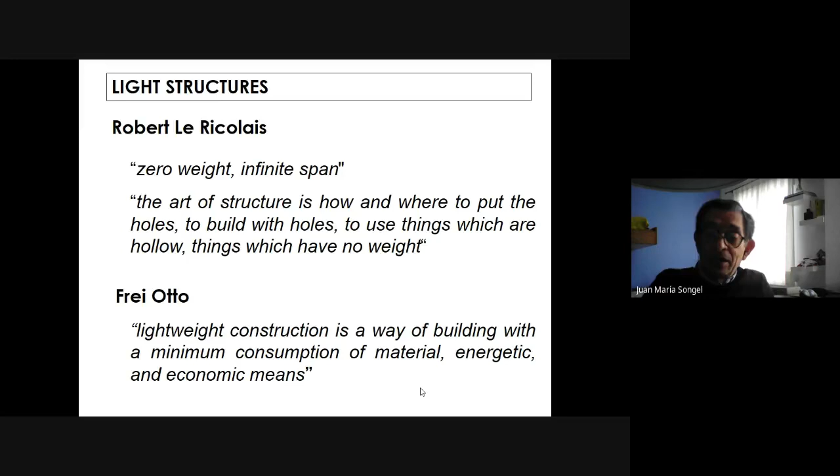Concerning natural structures, we've been talking about light structures, natural structures. There is another author, Matila Ghyka, who in a very interesting book, originally written in French and translated into English, The Geometry of Art and Life, underlines the principle of least action for the inorganic world and the principle of economy of material for the organic world. So least action and economy of material: two principles present, active, in the inorganic and the organic world.

And Frei Otto, concerning natural structures, says that the form of a natural structure is the form of a structure which transmits the forces received to the supporting points with the least amount of material. Again, amount of material. And somewhere else he says that natural structures are structural systems whose construction does not derive from a planned process, but comes from self-forming or self-organizing processes. Now, this is a key idea.

If we see, as we are going to do, his models and his explorations, we will see immediately that his approach is not to impose a preconceived idea on a certain material, but to see which forms that material generates from different types of forces. So he explores in his experiments many different physical self-forming processes. Let me give a very simple example.

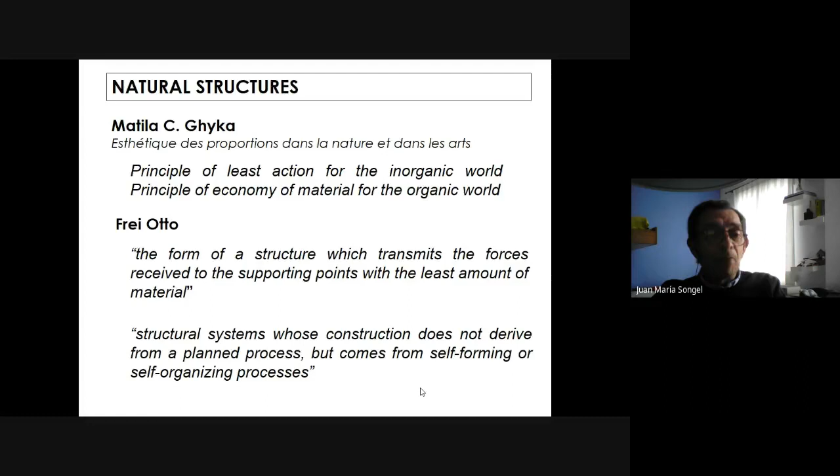If you take a chain and you hang it from both ends, the chain immediately adopts the most suitable form to work in tension, because that chain is absolutely unable to work in compression. So it adopts the form of a catenary curve to make sure that all stresses are tension and no compression. That's a simple self-forming process. The material itself has found the most adequate form to transmit loads in the most effective, most appropriate way.

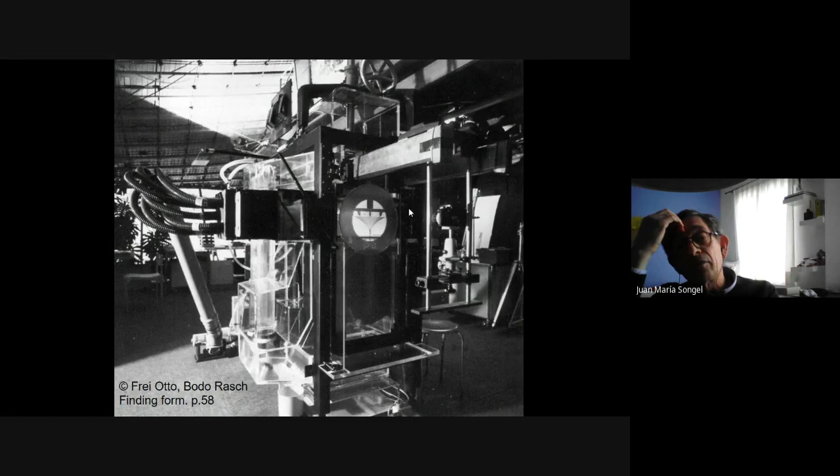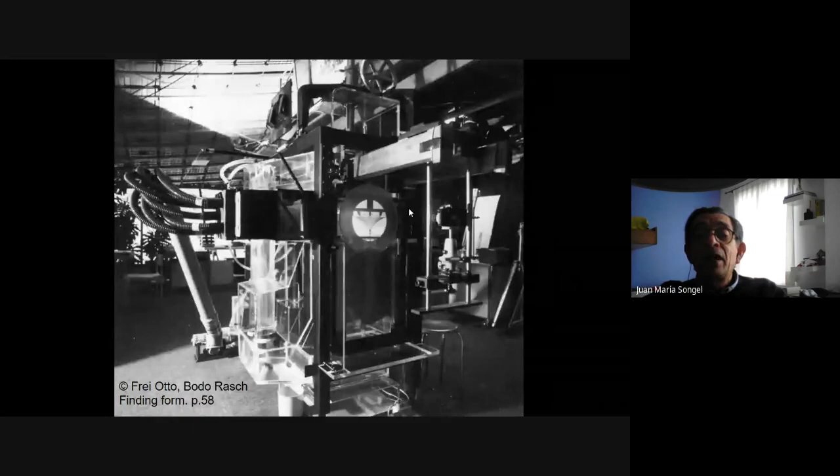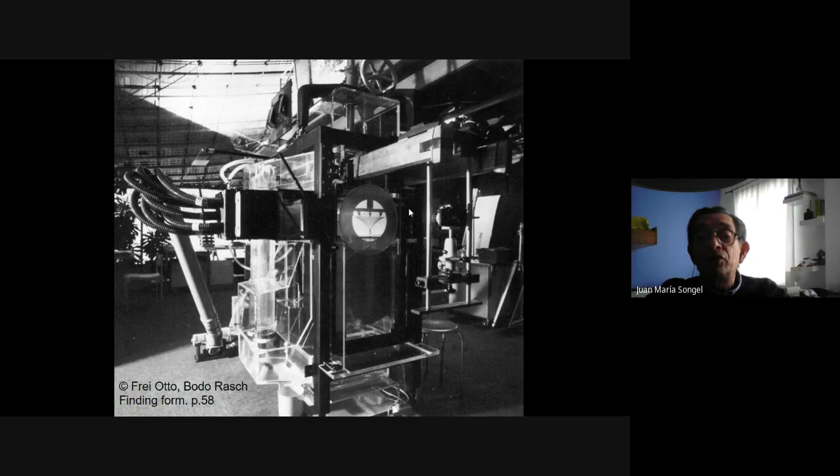He worked with soap film models, which are, as we will see later on, physical phenomena that develop minimum surfaces with specific border conditions. Soap film is a very weak structure. It breaks very easily, very quickly, and it therefore needs a chamber with damp and low temperature in order to allow these forms to stay.

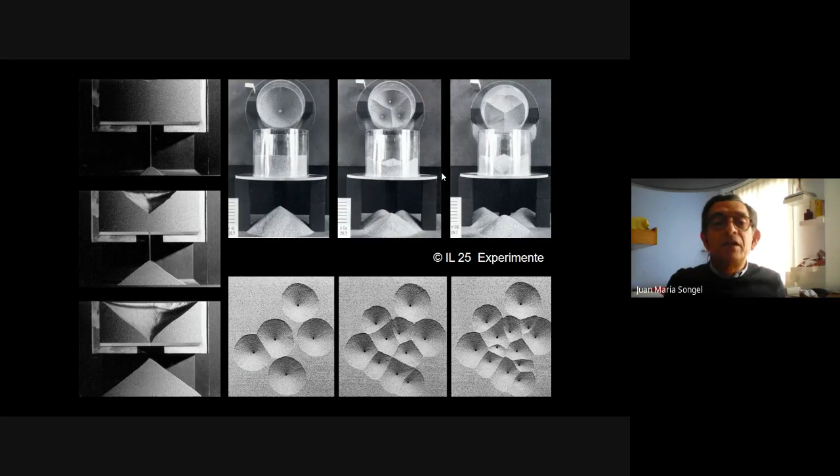Other types of experiments and models are grain heaps. Which forms do heaps of grain develop when, for example, you take a cube in which you have grain and one hole? That hole allows grain to pour down and create a sort of mountain with the adequate slope. You know, this is the natural slope according to the material.

And you see how this form develops, and also this form, a void and a solid. So at the end, you get these two forms. Now, when you do this with a number of mountains, you get these forms. Instead of one single heap, you connect different heaps of grains of, for example, sand. Here you get different forms. All of them are the result of a physical phenomenon, a physical self-forming process.

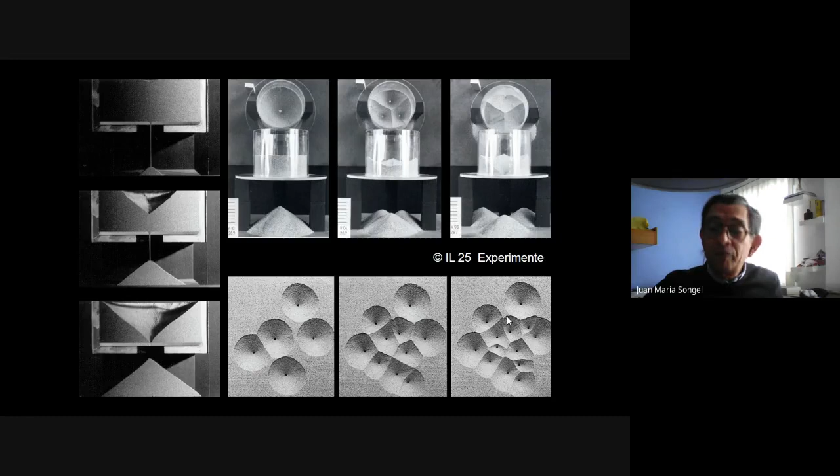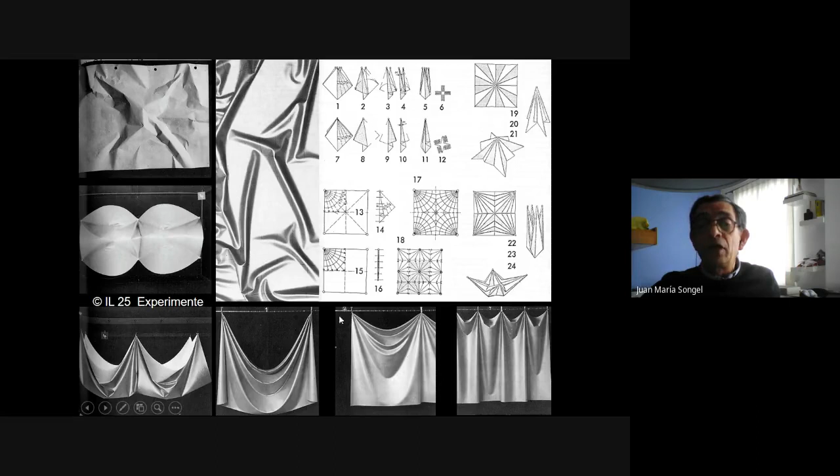So by exploring folds, he developed deployable structures, roofs made up with pieces of cloth with extending membranes that can be folded out and down, can be deployed, and as you can see here, either making radial foldings, these are radial foldings, or linear, rectilinear folds made up by running along a rectilinear straight line.

This is a model of another of Frei Otto's inventions. That was invented quite early in his life. He was 25 or 26 at that time, in 1950, when he developed this model. It is a multi-hinge arch.

Well, the theory of structures says that when an arch has more than 3 hinges, if an arch has 4 hinges, then it collapses. But Frei Otto, in his experience in life, you know that he took part in the Second World War as a pilot, and he saw ruins of structures, ruins of walls and arches, and he saw arches with more hinges than the theory he had learned. And so he thought, well, why is it really possible to build an arch with many hinges? And that's the model that he developed.

You see that the voussoirs, or the different parts of the arch, are made up by convex surfaces. Convex surfaces, they are singly curved surfaces, convex to each other, and therefore connecting on one single line. This piece with this piece connects at this point, this with this one at this point, this one with this one at this point. So the thing is that the weight does not surpass either end of the voussoirs, either here, or there. As long as the connection point is within the thickness of the model, it is stable.

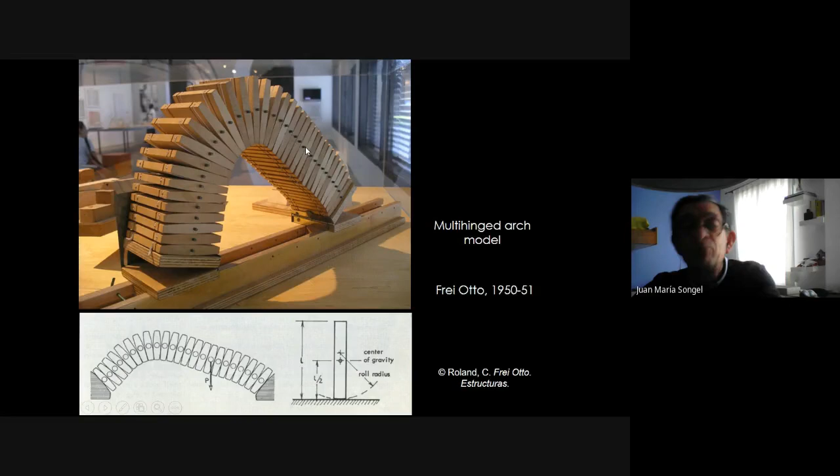Other inventions by Frei Otto, always trying to make the most out of the least. That was also part of his experience in the prisoner camp in Chartres in France, where he stayed for 2 years after the end of the war, from 1945 till 1947. Much scarcity of means, of materials.

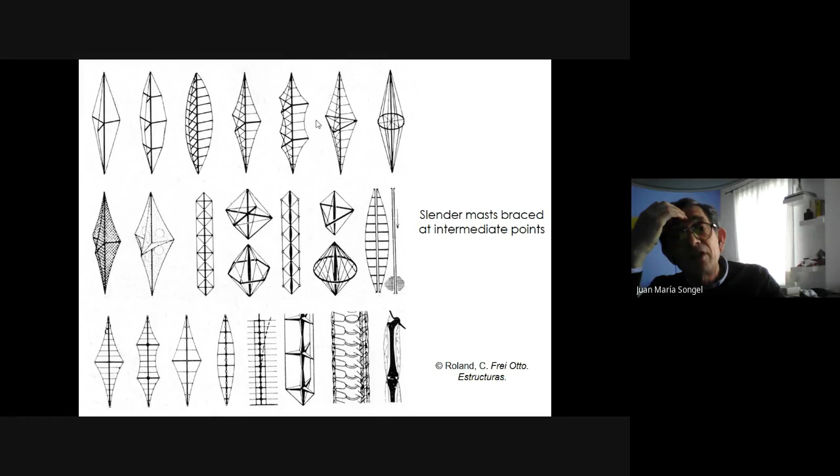How to build a bridge with rests of railway metallic elements, for example. How to build a column just with extremely slender elements, slender masts, by bracing them at intermediate points, as you see here. So here we see a combination of compressed masts and tensioned cables, creating an overall slender mast. Here we see also a picture of our column, the human column at the back, which somehow reminds one of these types of structures.

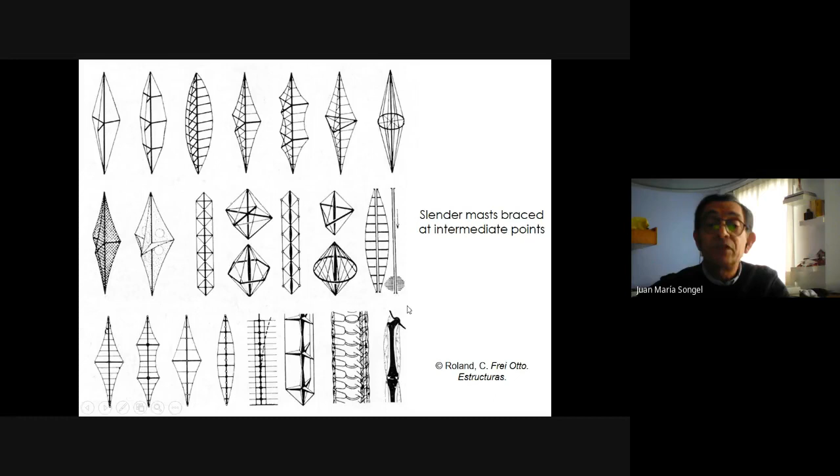And that's actually also the source of inspiration for these types of models that he also developed. A hinged mast, or as he called this, a mobile arm. You see a core which is made up of a steel slim element here, these triangular plexiglass elements, and these tensioned cables that allow you to control this hinged mast or mobile arm. You can move it in different directions depending on the strings that you are pulling at the bottom.

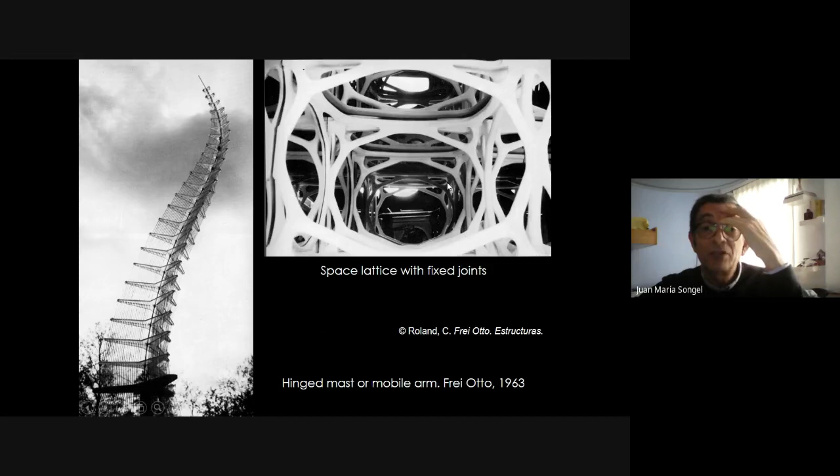And also another structure that he developed. This resembles very much this: when Buckminster Fuller, a great friend of Frei Otto, saw these models, he also saw pictures taken from microscopic creatures like radiolaria, for example, or pieces of bones. And there they found that the patterns developed were very similar to the ones that he had developed here, for example, this sort of a space lattice with fixed joints.

Another type of model is branching structures. These are made up by applying the inversion principle with hanging strings. There we start with this point. Here we have strings branching from this point until that point, and from that point another group of branches here, so that you get at the end this grid of points, from this point to this grid, through an intermediate group of branches with different levels.

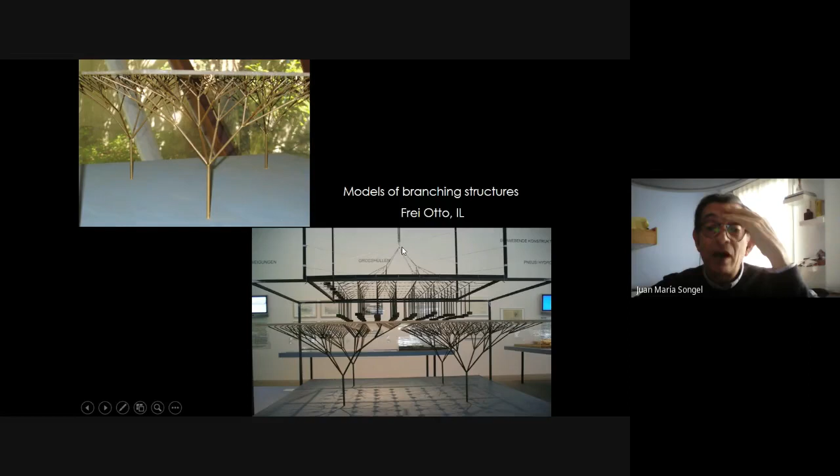And these are hanging loads. These hanging loads are tensioning all these strings and are another physical self-forming process, because this load is giving the actual slope and the final form for these strings. And if you are sure that they are working in tension, because they are not able to work in compression as they are hanged, then you invert it and you get this branching pattern in which all the different bars or elements should be working in compression.

So loads coming from, we could only talk about gravity here, vertical loads, no horizontal, no wind, no earthquake, only vertical. The form shaper, the element that is shaping the form of these models and these structures, is gravity. So here we have this branching structure developed, as you can see, with 1, 2, 3 branching levels from the bottom till the top.

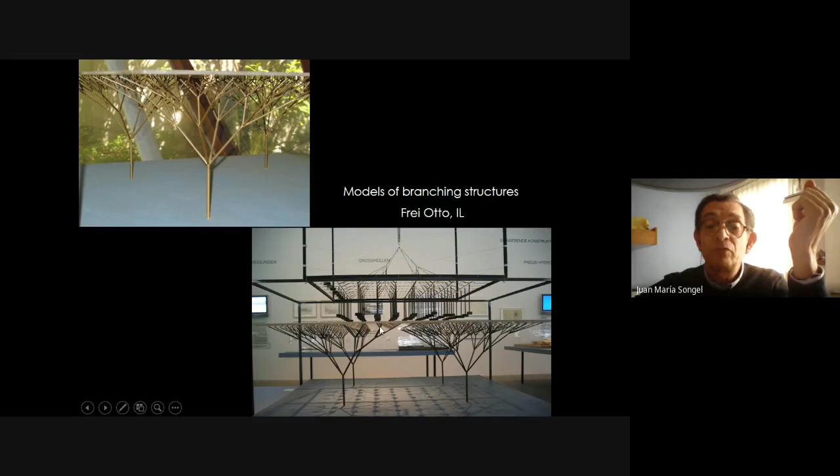And one real structure built with this type of branching structures you find in the main hall of the Stuttgart airport, which was not designed by Frei Otto. Frei Otto, we must say, invented new types of structures with his experiments, with his explorations, but it was in the collaboration with other architects who actually built these real size structures, like this Stuttgart airport. But of course, without the inspiration of Frei Otto, this would be inconceivable.

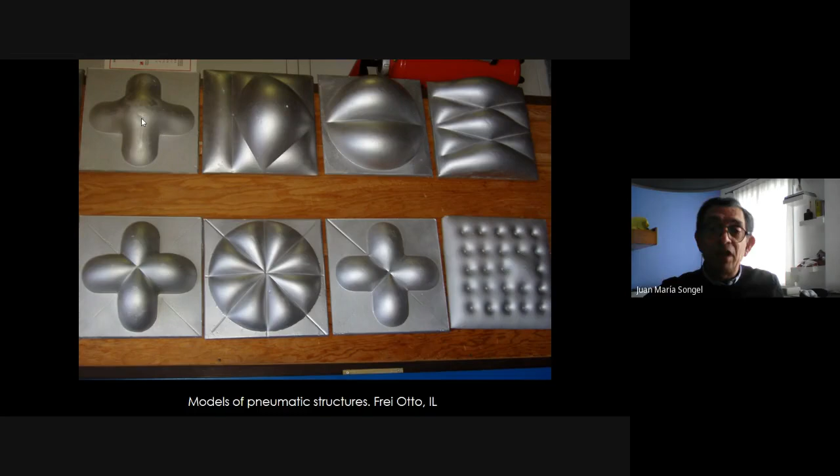Another model that we can find in the famous Frei Otto's tent, his institute, is this three-dimensional model of the Pantheon in Rome, this famous Roman structure that is still standing nowadays since the 2nd century, with a span of 43 meters and 30 centimeters that was not surpassed until the 19th century, when new materials like wrought iron were developed. So Frei Otto was trying to find out why the Pantheon was stable, and what was the relationship between a funicular hanging form and the form of the Pantheon.

This is always an interesting issue, because we see that along the history of architecture, vaults have adopted very specific forms in Roman times, in Romanesque architecture, Gothic architecture, very often based on the geometrical simplicity needed for construction purposes, but seldom trying to wonder which one would be the most suitable form to work in compression only. So there we have the funicular forms, these hanging models. All of you are familiar.

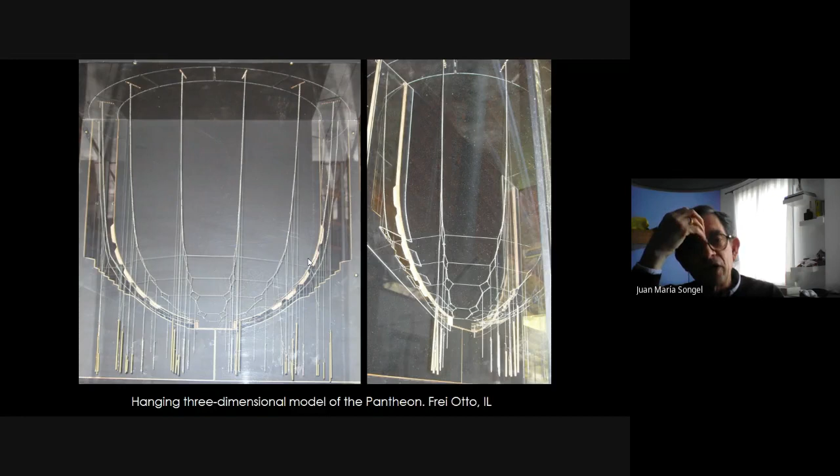I'm sure all of you know the famous Gaudí hanging models. Now the thing here is that these models developed by Frei Otto are three-dimensional. They are hanging strings, which do not stay on one single plane, but are also developed along the base of the Pantheon. And you will notice that once you apply the loads at specific points, trying to reproduce the actual gravity loads, you see the final form developed within the thickness of the actual structure. And that would be the reason why it is stable.

And on the other hand, these stresses, which in this case are tension, but if you invert the structure, that would correspond to compression, indicate that the semispherical dome is compressed along the upper hoop lines, but tensioned along the lower hoop lines. That's something that was known because cracks usually appeared with this semispherical geometry, with this type of domes.

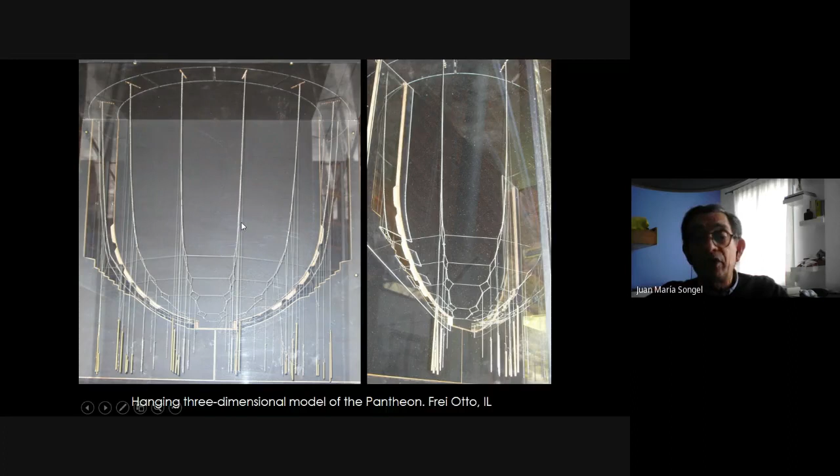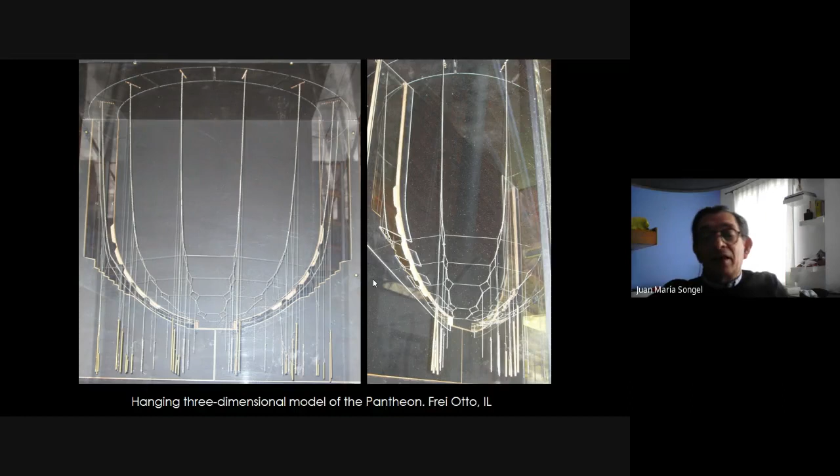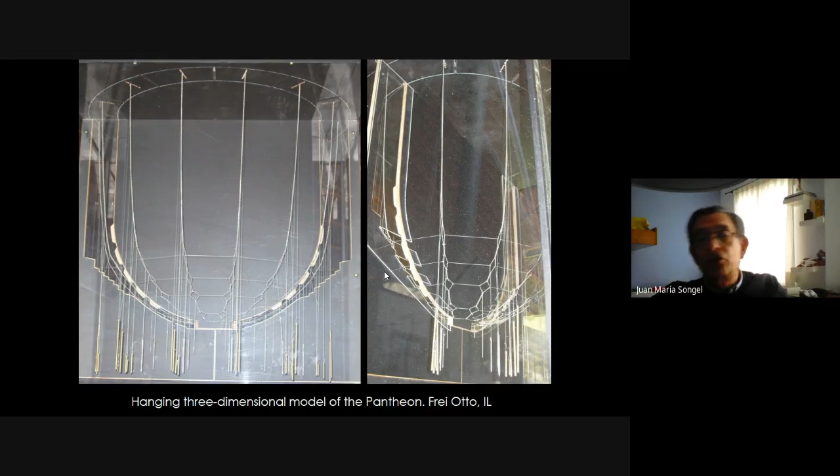But this model I wanted to show you just as a way of seeing how Frei Otto worked with them to explore the actual structural behavior of such historical structures as the Pantheon. Now, this is a summarizing scheme showing different self-forming physical processes. We've been seeing several of them used by Frei Otto, classified in accordance with the generating forces.

This has been taken from one of the books published by the institute founded by Frei Otto, which is devoted to the different types of experiments that he developed. These are physical processes in which tension is the protagonist, starting from a simple cable being pulled apart from both ends, or a chain being hung from both ends, or a simple straight vertical line with a weight at the end, or these minimal ways I showed you before, or these minimal surfaces with two upper points and two lower points developing with a soap film model, for example.

Soap films, branching of viscous liquids, cable nets developing minimum surfaces. These polyhedral foams we saw also, tight packing. Compression, the multi-hinged arch we saw, the inversion of the catenary, these arches, and other suspended nets that we will see also later on.

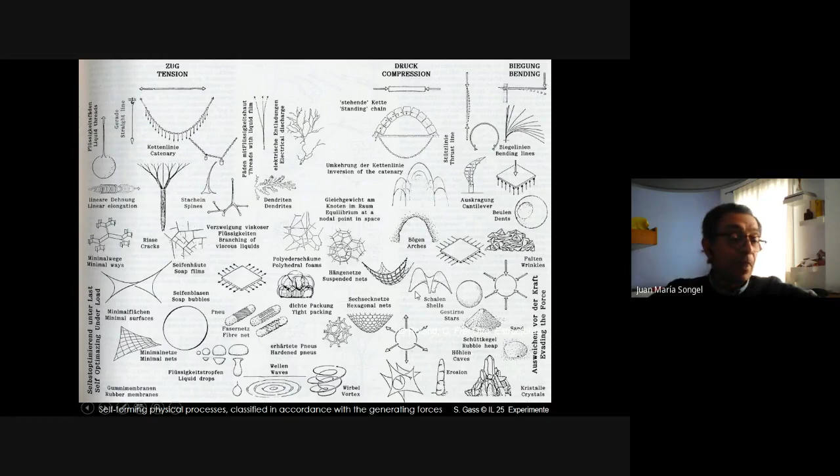Well, I see that we are running out of time. We have only 5 minutes left. I'm sorry that I have been a little bit too slow, maybe. But it's fine, Juan María. Yeah, I just wanted to show you, in these 5 last minutes, at least 2 types of structures which are very innovative, very interesting, and I wouldn't like to finish without talking to you about them.

Okay, well, here this is another classification of these same physical phenomena based on the generated forms. We saw earlier the forces, and here we have the resulting forms, either linear or surface or spatial elements.

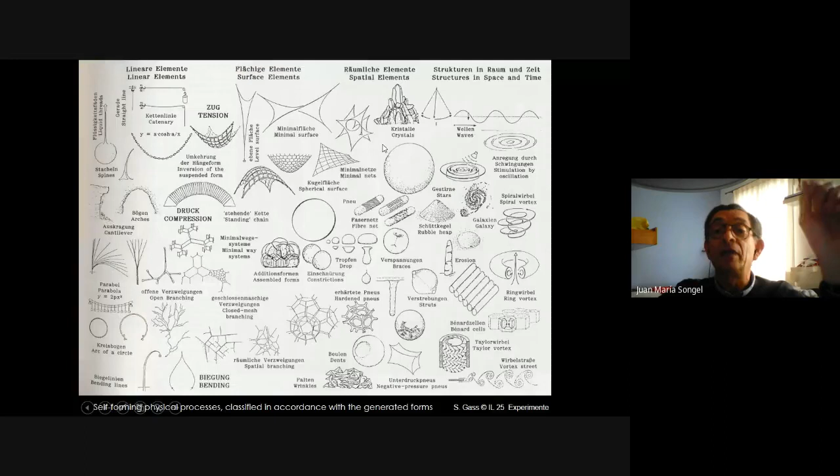Okay, so let me go down in my presentation. I miscalculated the time. I just wanted to show you so many things that it's impossible in 1 hour. Okay, this will be very quick, hopefully, I promise.

What is the problem of a membrane surface? The problem is not weight. It is an extremely light structure. The problem is form, to make sure that form stays. When you have a flat membrane that is being pulled along the edges, and wind is blowing, it flaps. So how can you stiffen that thin surface? By form,

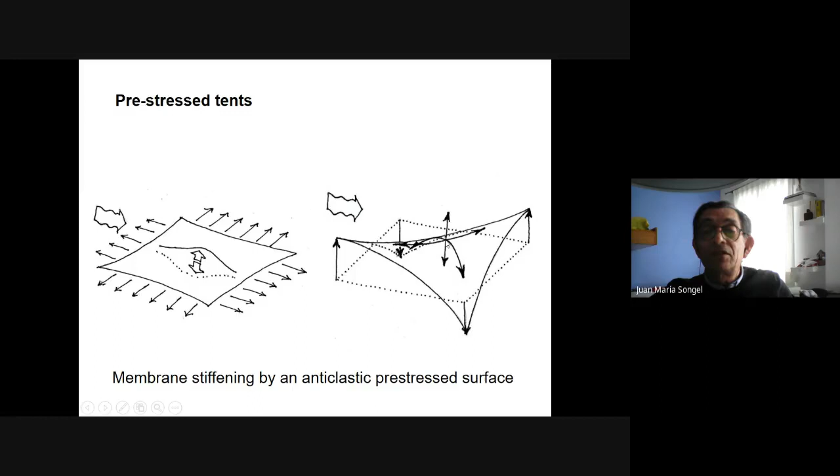by making that flat surface adopt this saddle form, this doubly curved anticlastic surface, 2 lower points and 2 diagonally opposed upper points. This makes sure that every point is subject to 2 opposing forces, one trying to connect these 2 lower points and another one trying to connect these 2 upper points. So these 2 opposing acting forces stabilize the position of each point of this membrane.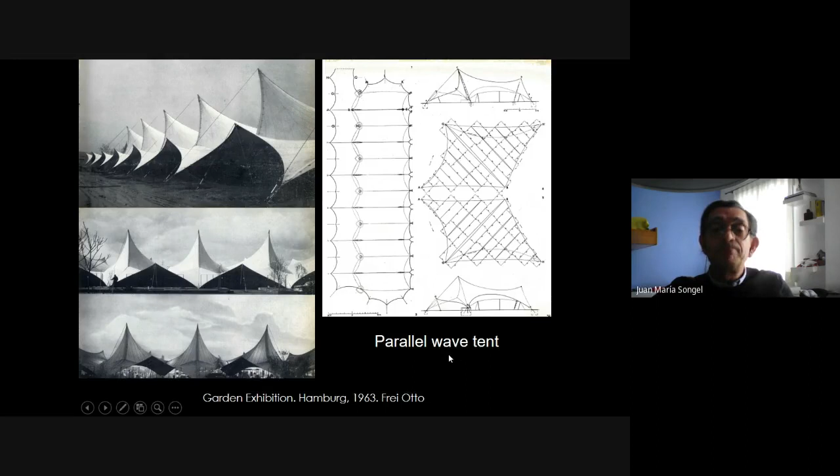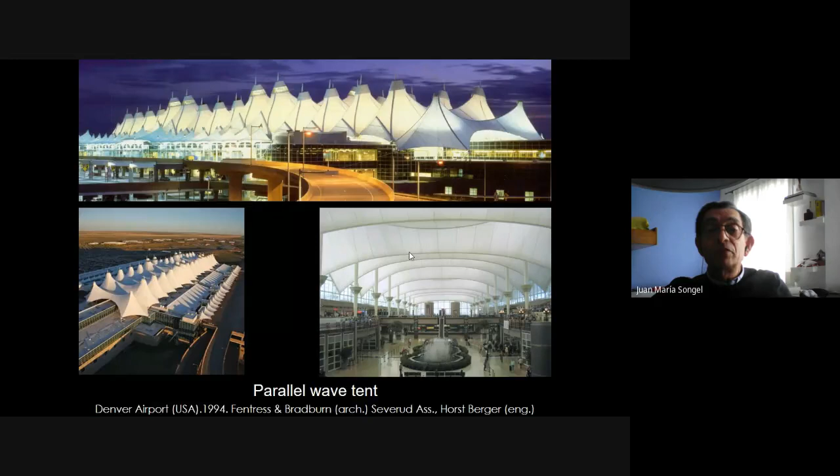Here you have a real parallel wave tent built for a garden exhibition in Hamburg, 1960s. This is a real structure, Denver Airport, 1990s, made up with this type of parallel wave tent developed by Frei Otto. This is an undulating minimal surface with radial ridges and valleys, a soap film model. Here, the ridges and valleys are no longer parallel, they are radial.

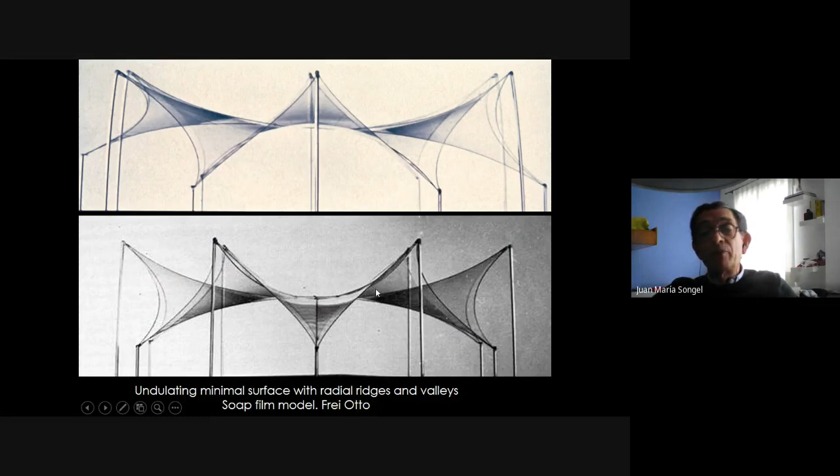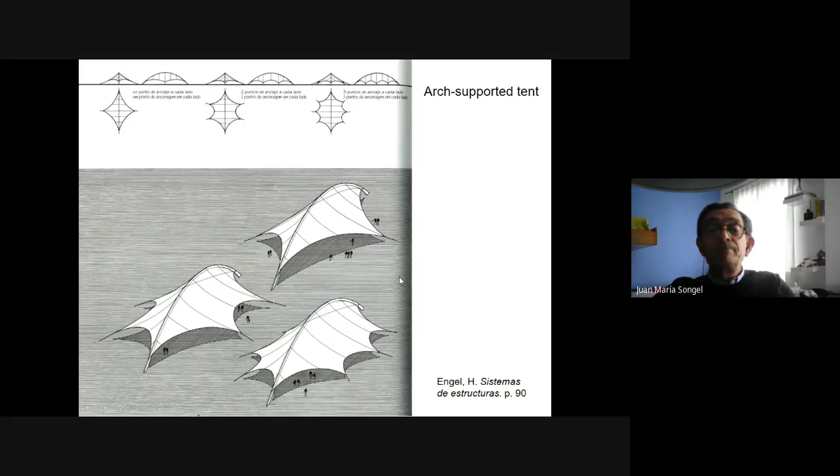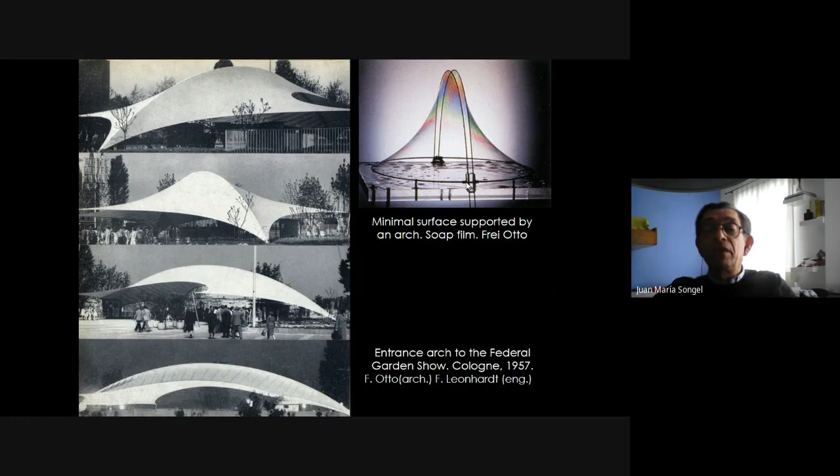Another type of tent is the arch-supported tent. You have an arch which is being compressed by these tension membranes. A real structure, which was the entrance arch to this Federal Garden exhibition that took place in Cologne. And this is the inspiring model made up with soap film, a minimal surface that we saw earlier.

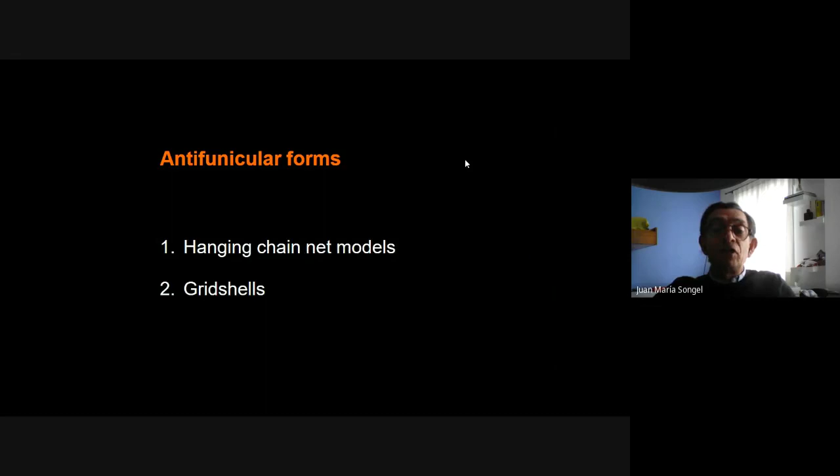Plan, cross-section, pictures, antifunicular forms, hanging chain net models, of course, the models of Gaudi mentioned. This is a workshop that we make here in Valencia with our students at the School of Civil Engineering, because I think it's good for them to see also how gravity shapes form.

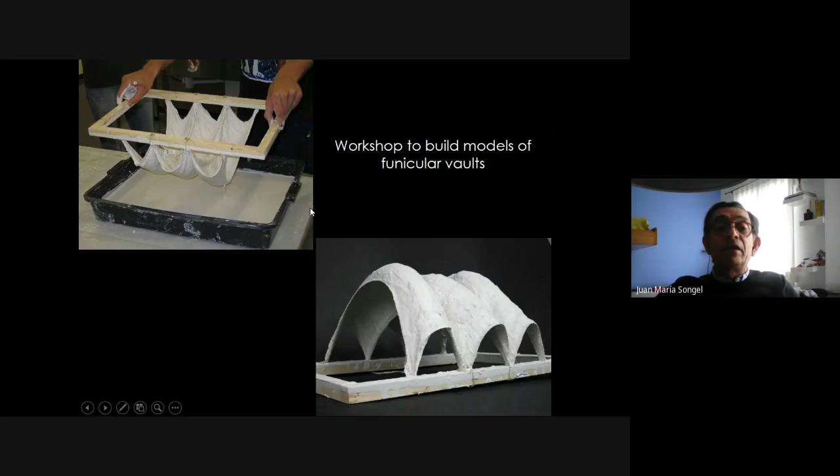It's a simple piece of cloth that is soaked in plaster, submerged and immersed, and then you leave it on. It's very beautiful to see how the piece of cloth, which is a simple piece of cotton, which has no weight, nearly zero weight. So you see the form before it is soaked in plaster. When it is soaked in plaster, it is actually loaded.

And when it is loaded, then you get the real continuity of these funicular forms, of these edges, these border edges, or these groins, these ridges. So there is a difference between this and this. The difference is that this is not loaded, this has been loaded, and therefore it is a real anti-funicular form.

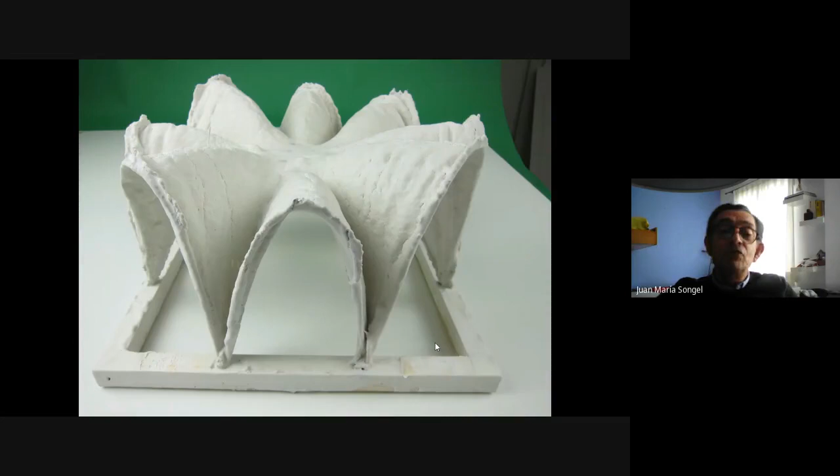You invert it, and you get these beautiful inverted models with these funicular vaults. And you can make all sorts of variations, different types of arches, different types of spans.

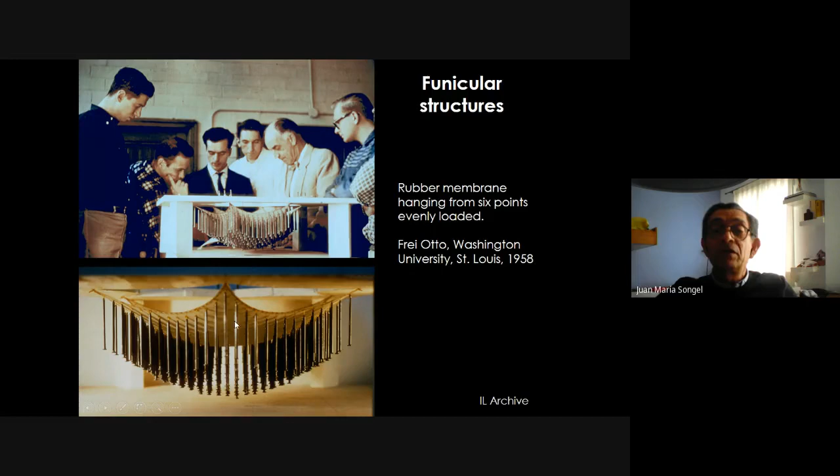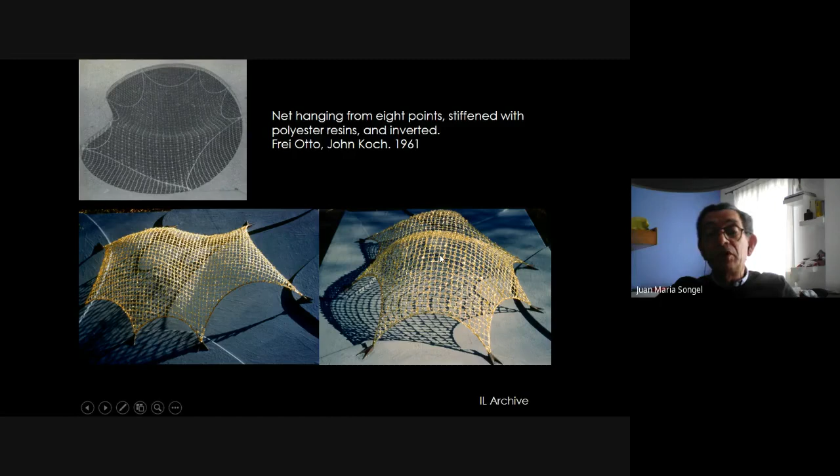And here we see a historical picture of Frei Otto in the 1950s in Washington University, with another funicular structure, rubber membrane hanging from 6 points, evenly loaded by these nails, or yet another type of hanging net from 8 points, which is stiffened by polyester resins while it is hanging, and then once it gets dry, it's inverted, and you get these forms, which you also get when you get a hanging chain net.

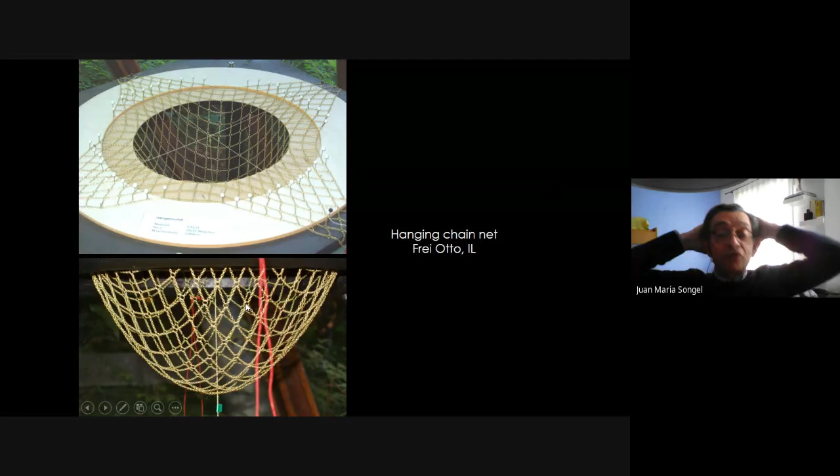This is another interesting new type of structure, not just one single chain, but a chain net. When you get a chain net, you get a three-dimensional form made up by linear elements, which are working in tension only. And as you graduate the borders of this chain net, then you get this continuous doubly curved synclastic surface, which is the model to create a grid shell.

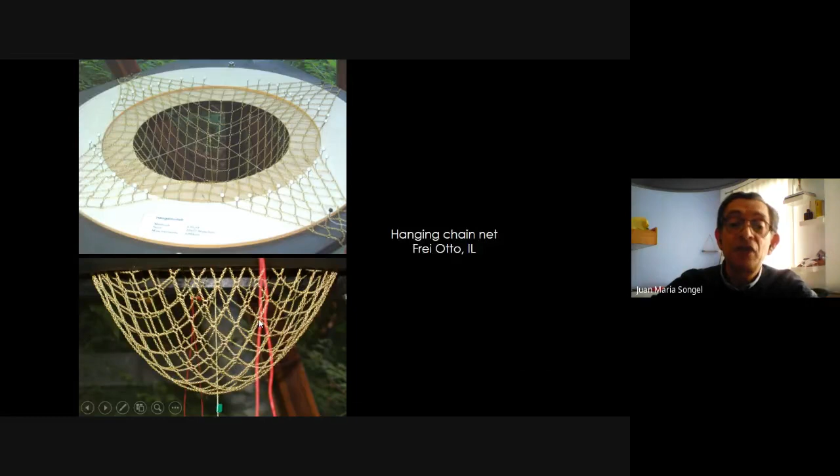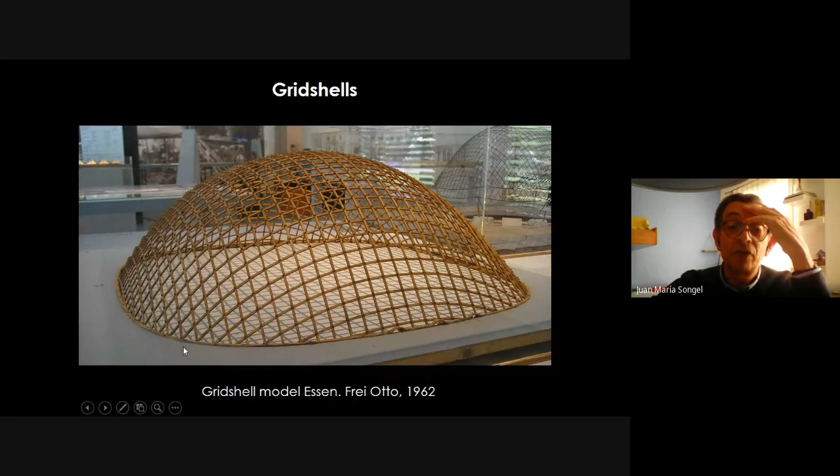And there we come to another great invention, another great structure invented by Frei Otto, a structure made up with wooden or timber laths or slats, which takes the form of a hanging chain net. This is a model made up by chain laths, one type of grid shell, a grid shell which is made up of a grid of laths. And there you have at the bottom, connecting with the ground, a continuous edge.

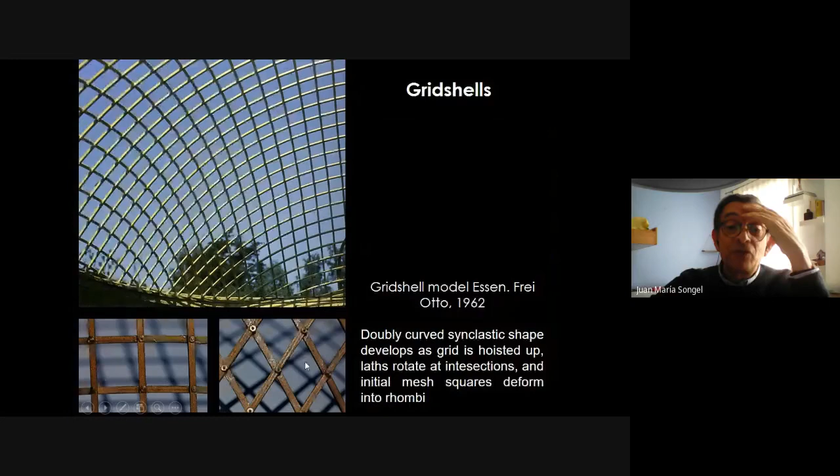This is one of the first real grid shell models that Frei Otto developed in Essen in the early 1960s. As you can see, it is a doubly curved synclastic shape that develops from a flat slat grid on the bottom, on a horizontal floor. You put this flat grid, which starts like this, with these squares, and these hinges. These are hinged connections, nuts and bolts, which are not tightened.

They are loose. So the thing is that you hoist up these laths to the height that you have calculated with a hanging chain model. Then these points rotate. At these intersections, the grid rotates, and the initial mesh, which was made up by squares only, transforms or deforms into rhombi, different types of rhombi. These are sharper rhombi, and these are less sharp rhombi.

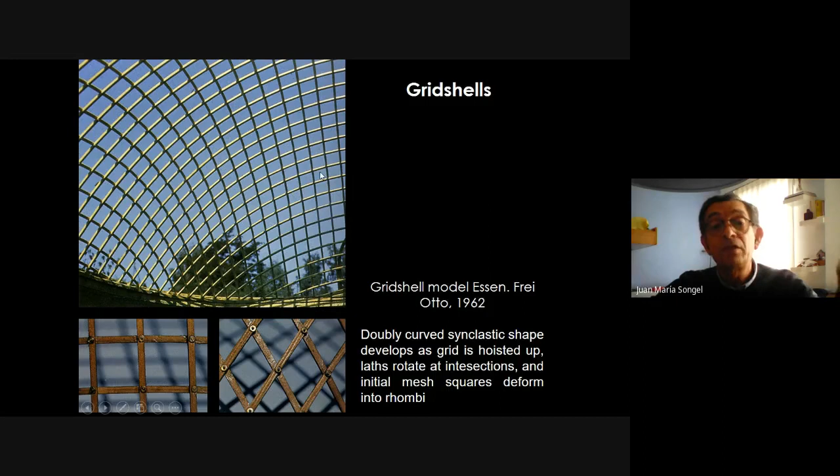But there you see the process. You get the flat wooden slat grid on the floor, a square mesh. You hoist up specific points of the grid, and then the intersections move, rotate, because they are loose. And once you get the desired position, then you tighten all the hinges, and when you tighten them, you connect also at this point. This is one type of grid shell, a grid shell with a continuous edge at the bottom.

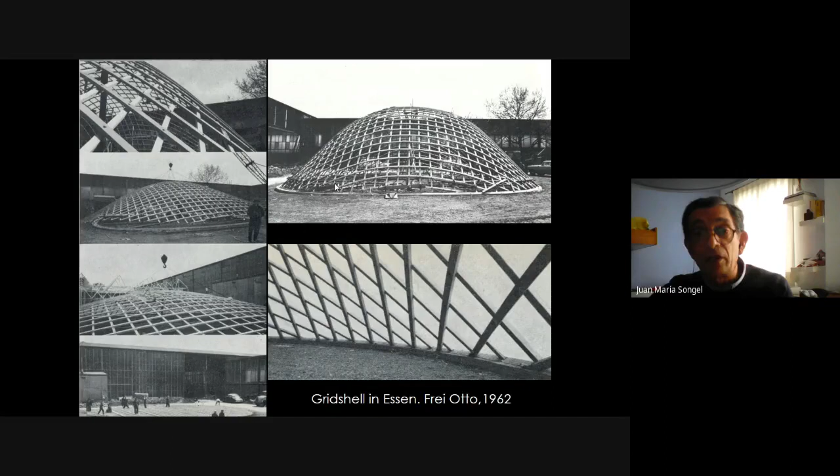Then you get a fixed structure, a fixed vault, which Frei Otto named a grid shell, because it's a thin shell, but made up from a grid, and even lighter than a thin reinforced concrete shell, and having the advantage of allowing light inside.

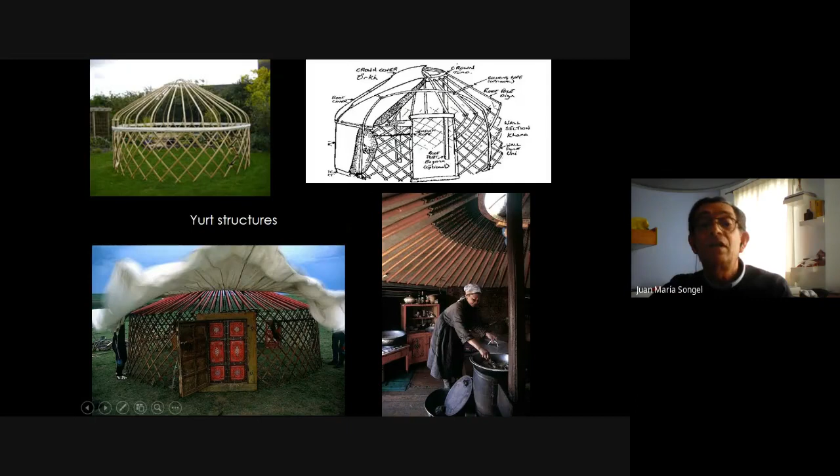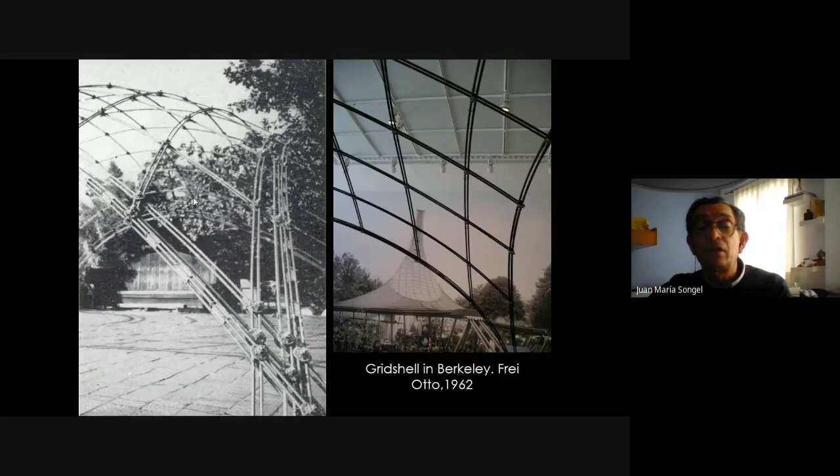It's very similar to what a yurt does with this grid, or other more primitive or vernacular structures. So there you see the hanging model, and there you see another grid shell developed by Frei Otto, in this case with reinforcing steel bars, that took place in Berkeley in the States. You see more in detail the connections, the points where the hinges are tightened, a model with the original flat square mesh grid deformed and developed into a doubly curved grid shell.

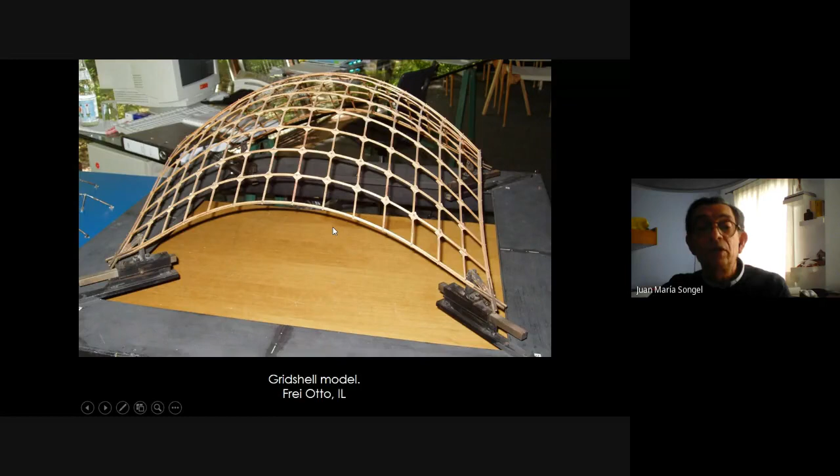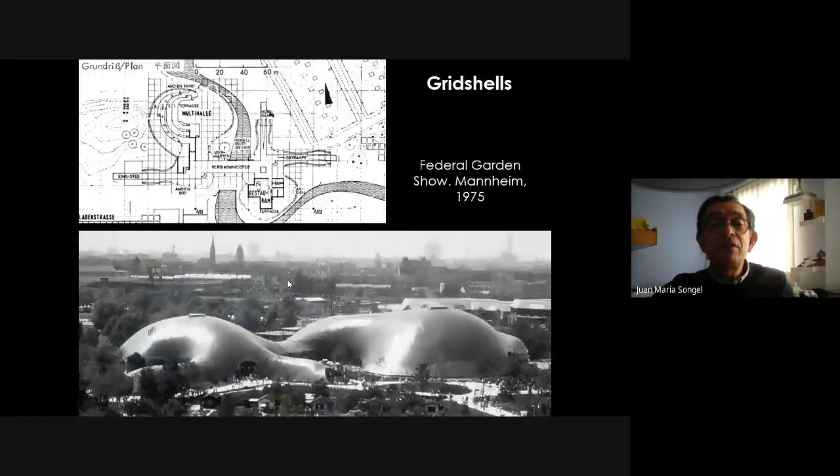And this is a picture showing one of the greatest grid shells that were built, that Frei Otto designed and built for this federal garden show exhibition in Mannheim in 1975, with spans longer than 60 meters at this point, and with forms inconceivable at that time. These are not capricious, whimsical forms. These are anti-funicular forms, forms that have been developed by a hanging chain net model. This is the model from which these forms were taken.

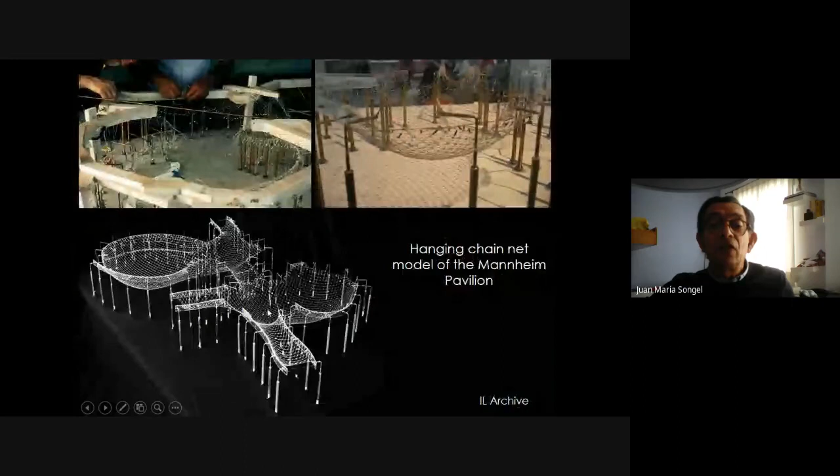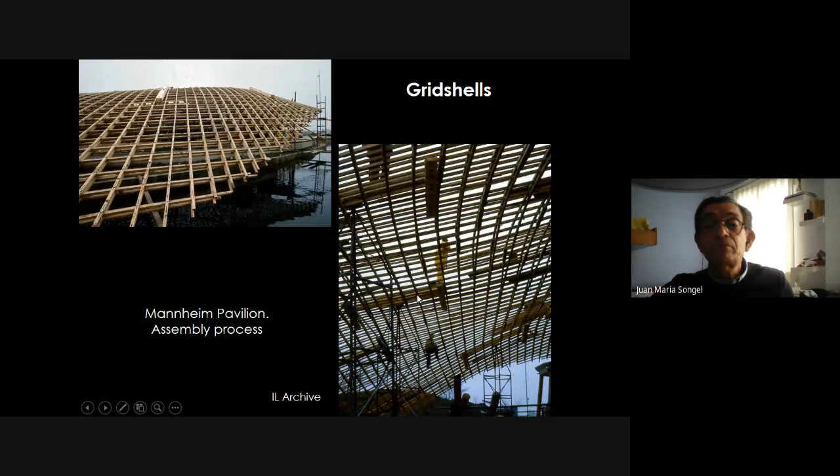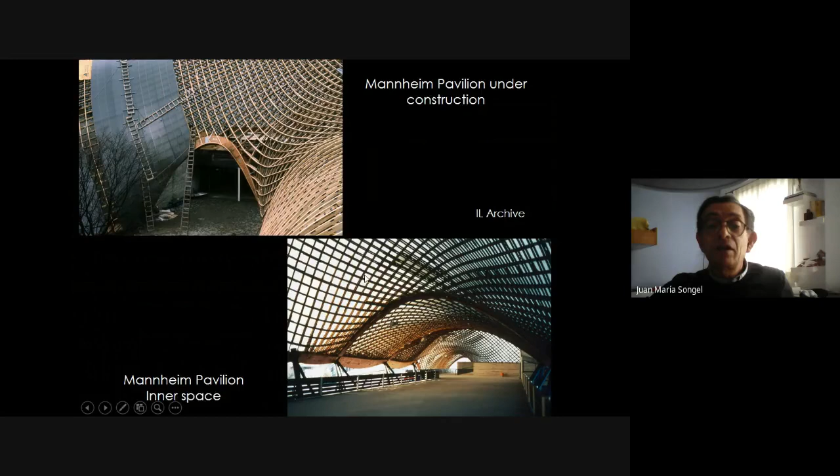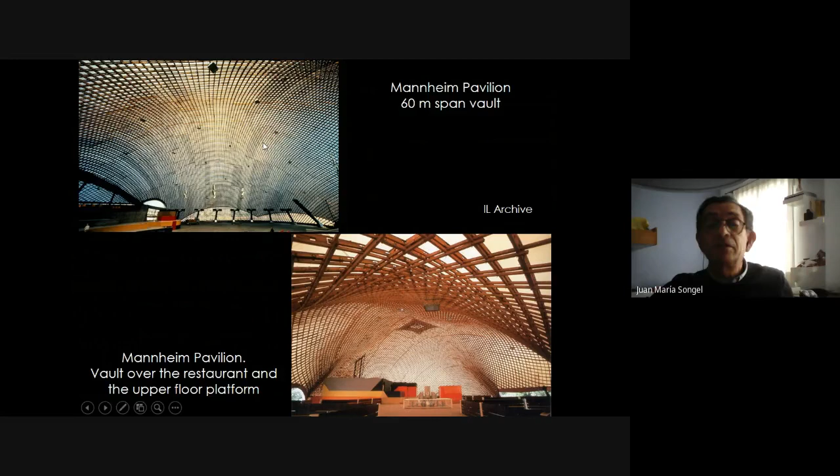And once you get the heights at these specific points, then the grid, which is deployed on the floor, is hoisted up at specific points. And when it is hoisted in position, then all the hinges are tightened. This is a double layer grid shell, and you get incredible, nice, doubly curved synclastic and anticlastic forms, producing a vault full of light. It was covered with a thin transparent membrane, 60 meters span, extremely light structure, and some pictures that I took when I visited this formidable structure.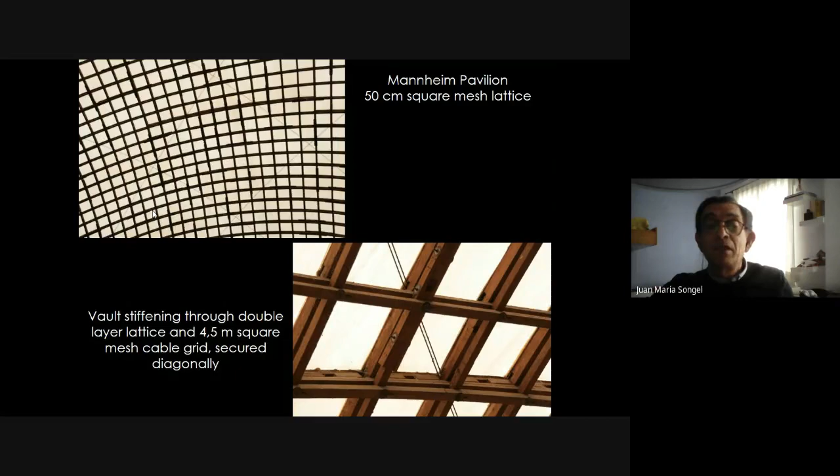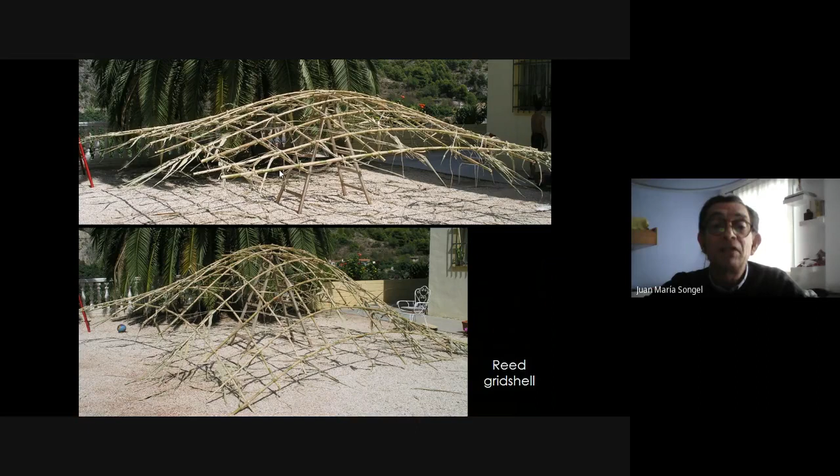So, well, and this is a grid shell that I built myself with my children in summer with reed and with strings, diagonal strings, to make this grid curve and adopt the synclastic doubly curved form. So I stopped here.

Because I had many more things, but it's longer than 1 hour. Sorry for the 10 minutes that I have surpassed the hour. Thank you for your attention. I'm open for any comments or questions that you may have. It's impossible to summarize in 1 hour all the richness of the work of Frei Otto.

Yes, thank you to you. Okay, the good thing is that we have to invite you again for more lectures. Okay, so yeah, it was a really impressive lecture, and I think it was very well related, and there are things that we were all very happy to see from another point of view. So I think very nice explanation. So I'm going to leave it to the students if they have any question. Now is your opportunity.

Okay, if not, I'm going to ask you, how did you get in contact with Frei Otto's world? Did you have the chance to meet him? Yes, I met him while I was writing my doctoral dissertation in 2004. I went to visit him at his home in Stuttgart and his workshop. He showed me his models. That was a great privilege. And you asked me why I became interested in Frei Otto's work. How it happened, and were you working in... Yes.